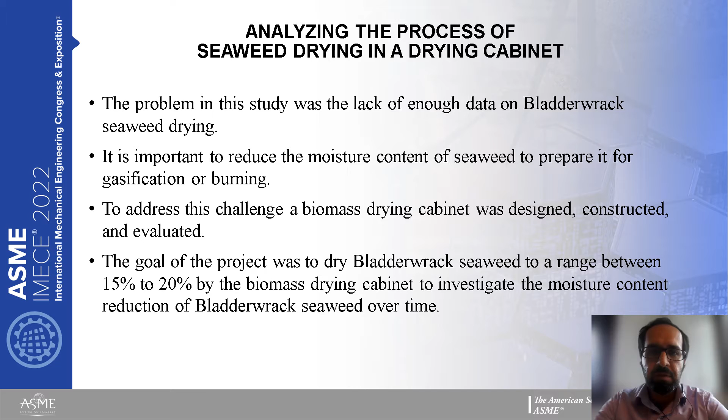Seaweed farming has many environmental benefits. It needs no land, no irrigation, and no fresh water. Seaweed farming can mitigate eutrophication and balance pH in oceans. It grows very fast and absorbs carbon to grow.

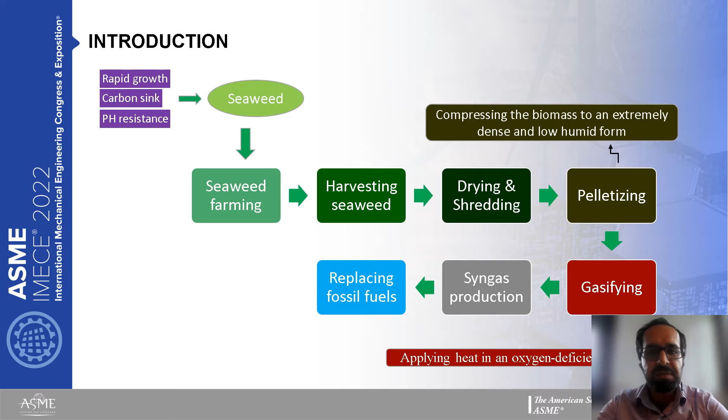Seaweed can be converted to a valuable fuel through the process called gasification. However, it needs to be pre-processed before gasification. Drying, shredding, and pelletizing are necessary before gasification. Seaweed pellets can be used to feed animals or be sold as a renewable burning material and replace charcoal. Syngas, which is produced from the gasification process, can be used in internal combustion engines and gas turbines.

We performed 6 drying experiments with different drying times. In each experiment, 4.5 kg of seaweed was dried. The seaweed was weighed before and after each experiment, and Excel software was used in this work to process the data.

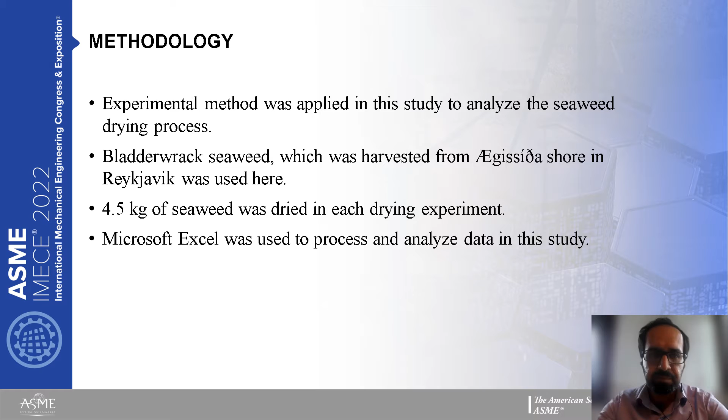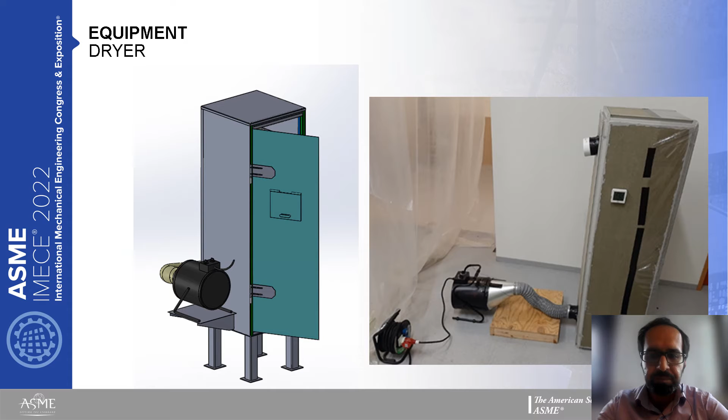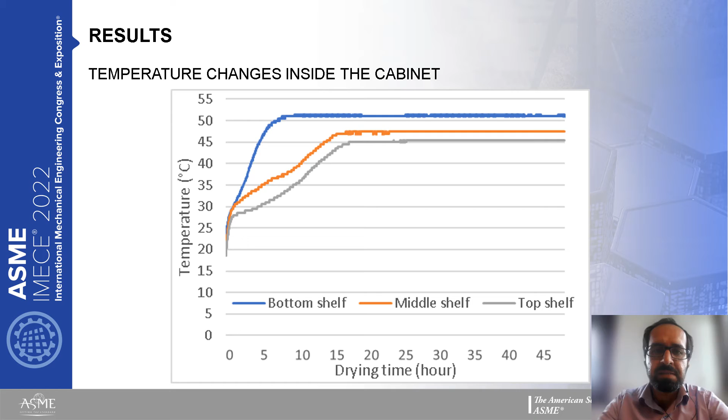Sorry. To solve this problem, an air distributor can be used to transfer the warm air to the cabinet through various points. Furthermore, after analyzing the results, the performance of the biomass drying cabinet was evaluated. For making this cabinet, wooden plates were used. Since no deformation was witnessed after the experiments, we can conclude that constructing a biomass dryer out of wood is feasible.

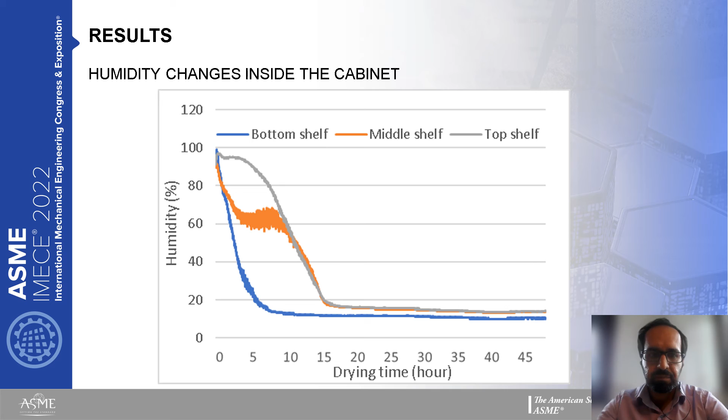To measure the final moisture content of seaweed after 49 hours of drying, 6 samples of seaweed were heated for 3 hours at 105 degrees Celsius in a laboratory oven. The samples were weighed before and after oven drying. The average moisture content of 6 samples was considered as the final moisture content of seaweed.

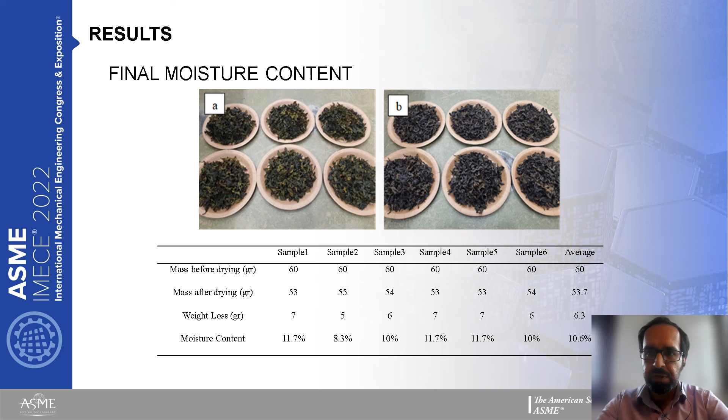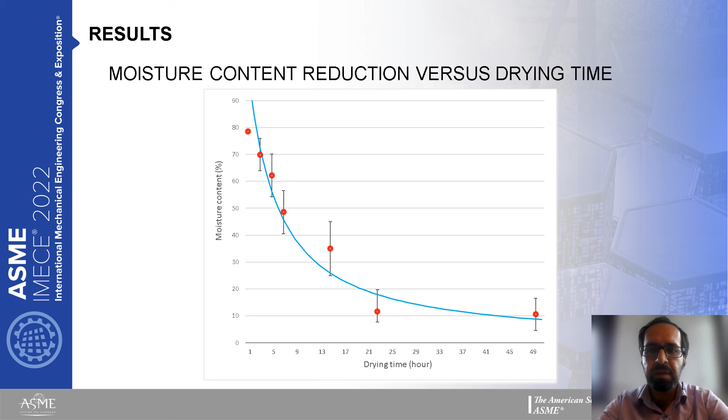The final graph shows the moisture content of seaweed during 7 different drying times. The first point shows the moisture content of fresh seaweed before drying. According to this graph, the moisture content reduces over time. The highest drying rate happens in the first 2 hours, and the drying rate is almost zero after 22 hours. By analyzing the moisture content of seaweed at different drying times, we can conclude that more than 50% of the mass of fresh seaweed is evaporated in the first 6 hours.

Conclusion. After performing various drying experiments, the moisture content of seaweed has been reduced to less than 20%. A moisture content graph for Bladderwrack seaweed has been produced, and the goal of the project has been accomplished. And moreover, more than 50% of the mass of seaweed evaporated in the first 6 hours.

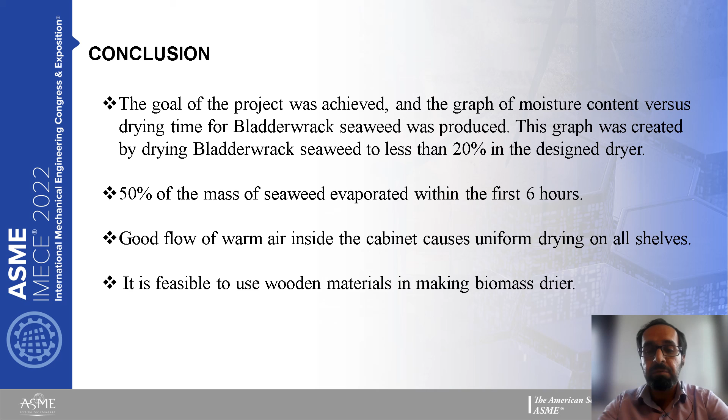The seaweed dried faster on the bottom shelves since the warm air was being injected into the cabinet from the bottom. Therefore, by having an equal distribution of warm air inside the cabinet, seaweed on all shelves will have identical moisture content after drying. The wooden plates that were used to make the dryer did not deform and sealed the cabinet very well. Thank you.